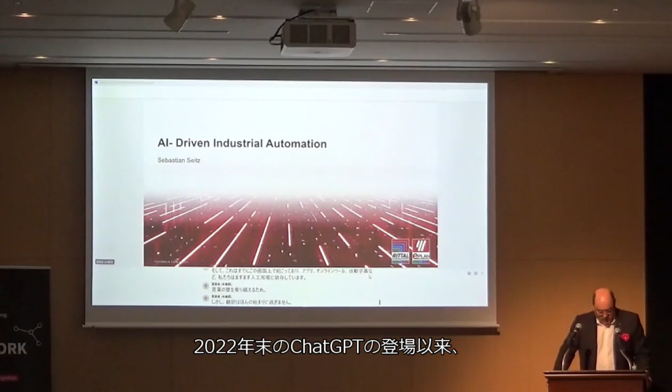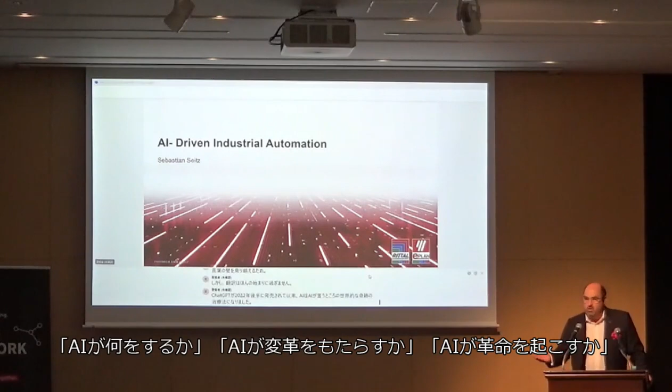But translation is just the beginning. Since the launch of ChatGPT in late 2022, AI has become something like a global miracle cure, a technology surrounded by both fascination and a lot of expectations. Hardly a day goes by today without bold predictions of what AI will do, what AI will disrupt, or what AI will revolutionize.

What I want to do today is bring this conversation a little bit more down to the ground, and especially how AI is finding its way into industry and especially into industrial automation, or even more specifically into electrical design. Before we take a closer look at what AI can mean for industrial automation, I would like to briefly introduce the Friedhelm Loh Group and the group of companies we are representing here.

Eplan, as you might know, provides software and services solutions in the fields of electrical and automation engineering. The company develops one of the world's leading design software solutions for machine and panel builders. Both standardized as well as individualized integrations to ERP and PLM/PDM systems ensure data consistency along the whole value chain. Working with Eplan means boundless communication across all engineering disciplines, no matter if it's small companies or big companies. Customers can apply their expertise more efficiently and work seamlessly in electrical engineering.

Worldwide, we are supporting a little bit more than 73,000 customers, and we were founded more or less 41 years ago, in 1984, and exactly 30 years later, EPLAN Japan was founded in 2014. Now we have a team of 20 dedicated employees operating from 3 locations in Japan: Tokyo, Osaka, and Nagoya.

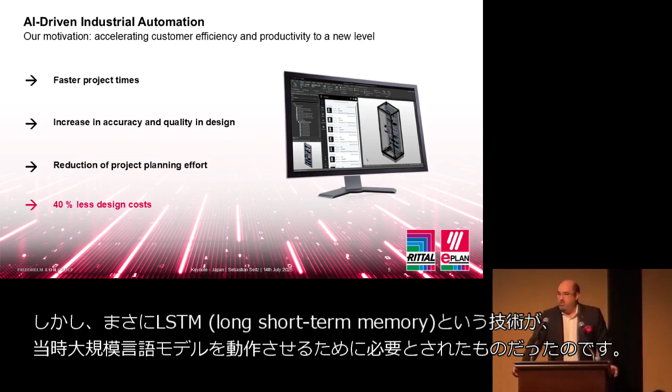In 1997, they introduced what is called the long short-term memory, which is an interesting phrase, right? A long short-term memory. But this is exactly what is needed to run large language models that were based on this invention at that time.

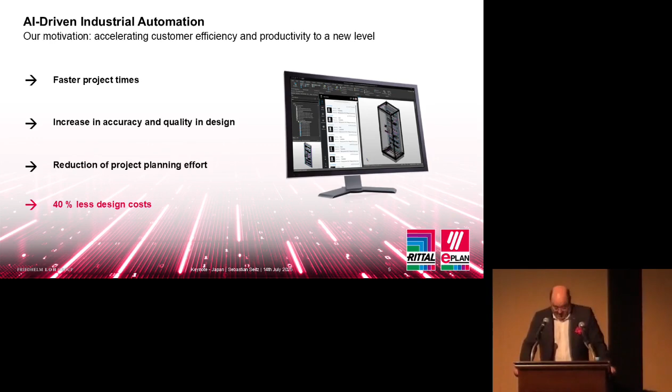These were not only milestones, but also - and this becomes then very American - billion-dollar investments by tech giants like Amazon, Google, IBM and Microsoft repeatedly led to spectacular demonstrations of what is possible. Think about chess computers beating human chess masters, AI systems winning board games like Go, or quiz shows like Jeopardy.

Yet none of these achievements truly brought AI into the mainstream. We all watched it, we were fascinated by it, but it never became applicable to what we are doing in our everyday life.

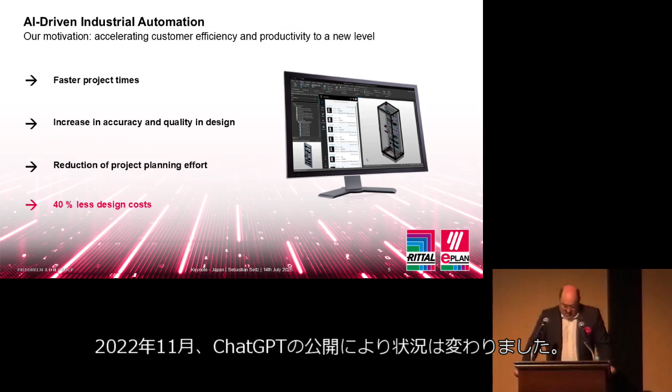But this changed dramatically in November 2022, when the ChatGPT service was officially published. Developed by OpenAI, it's based on a large language model which was trained on massive amounts of text.

For the first time, even complete novices could interact with AI in natural language. You can prompt in your own language with the model, and the model translates whatever it takes in each language and has in its backyard all the information it was trained with in the form of text.

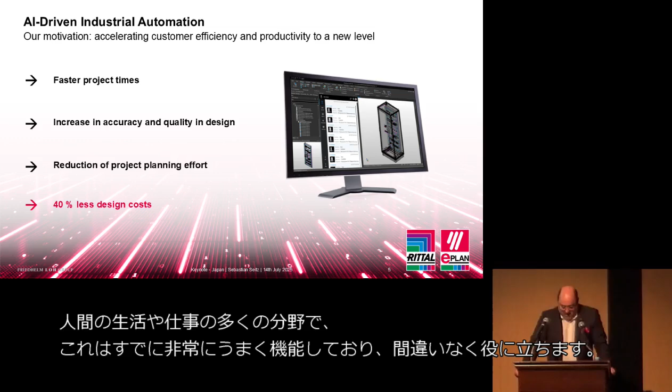From this time on, I think, is really a pivotal change - AI is on everyone's lips. Mainstream AI aims to extract the most meaningful response possible from its training data to answer a wide variety of questions. In many areas of human life and work, this already works remarkably well and is undoubtedly helpful.

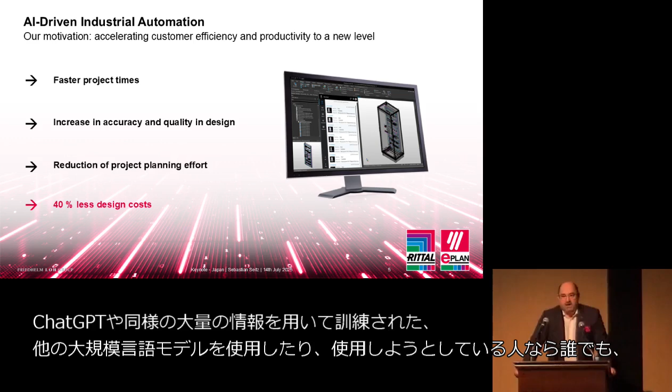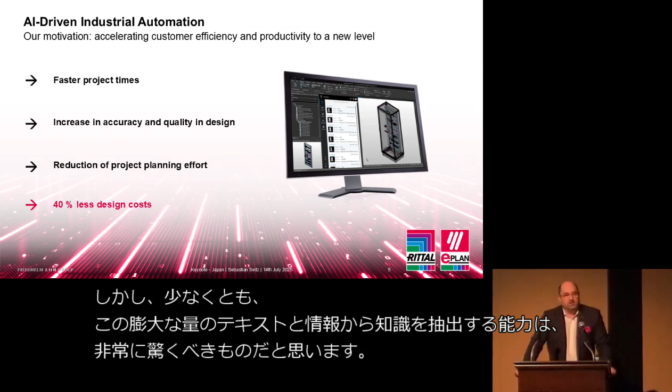I think everybody who's using or trying to use ChatGPT or any other large language model trained with a similar amount of information can see how meaningful this can be and how efficient you can get. That doesn't mean you always get the right answer, but the extraction of knowledge out of huge amounts of text and information is, I think, pretty remarkable.

Let me talk a bit about Eplan's approach on how to use AI. Our focus lies especially on the opportunities and potential in the industry. When it comes to supporting creativity, the key question is: how can AI relieve engineers or designers of tasks that can not only be automated but done even better and significantly faster?

I think we all know that in many processes there is still manual work needed, where we're repeatedly doing the same thing over and over again. This is something interesting where we need to think about how AI can help in replacing those tasks. I think we are far away from AI really designing products or being creative and shaping new ideas, but in helping us get rid of repetitive tasks and, let me say, bad work, this is something we really need to look at.

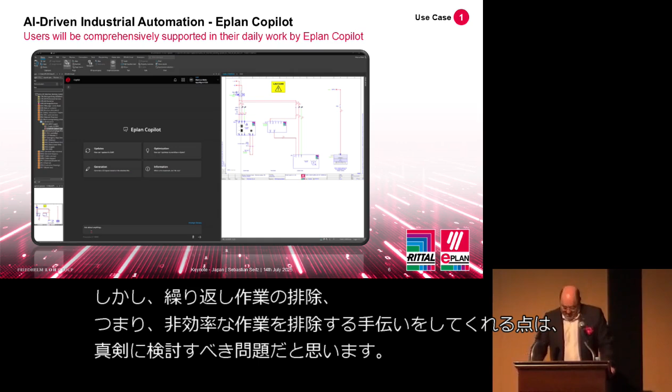And this is exactly where we as Eplan are looking into. Our mission is to empower electrical engineers with sustainable AI-based solutions that adapt to their specific needs while maintaining the creativity of a human being.

Developing these technologies is not a small feat, as you know. It requires deep domain knowledge and precise understanding of customers' environments. But this is where Eplan, I think, excels.

And we all know the inconsistency of AI as you have it available today. You really cannot trust the answers. Sometimes those systems are really hallucinating and creating funny answers. But think about it - you would ask an AI to do a security design for a machine. It would not be enough for this design to be right in 90% of all cases. It has to be 100% right.

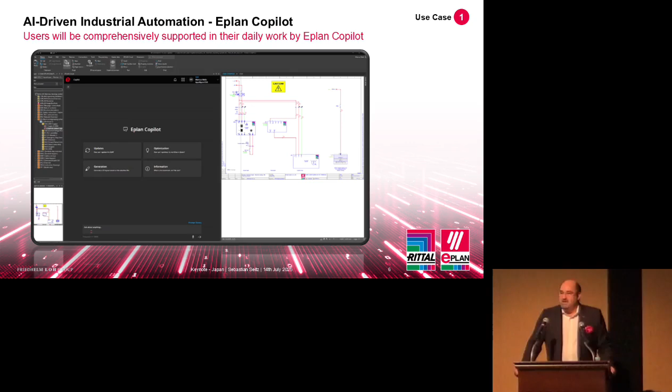So we all know that we need to train those models with very specific knowledge, a lot of domain knowledge, so that the answers a Copilot can create are not hallucinating, and you can rely on what the AI is bringing up as results.

For years we have focused on supporting engineers with innovative solutions, data, and methods to streamline and simplify their daily tasks. I think AI takes this even a step further, enabling us to develop tools that reduce manual work, automate repetitive tasks, and make the engineering workforce more efficient than ever before.

We rely on a strong team, so for Eplan this is not a new thing. We have experienced AI experts who develop data-driven and scalable solutions for automation and engineering. With deep expertise in software integrations and cloud technologies, we are creating intelligent applications that seamlessly integrate into existing systems. As pioneers in the automation of design and development processes, we actively shape the progress - practical, future-proof, and efficient.

We have been taking care of this since 2018. In 2018 we founded a team called AIDA, Artificial Intelligence and Data Analytics department, that has been working on the analysis and validation of engineering data, machine learning, and the use of AI models in the context of engineering solutions for automation technology.

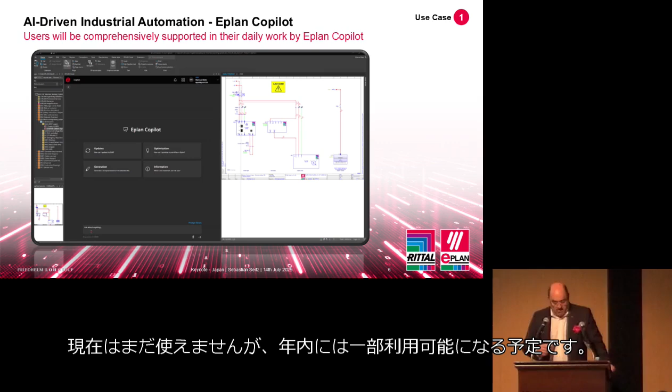So let me start with the Eplan Copilot. You can see it's already integrated in our surface. It's not available yet, but parts of it will become available by the end of the year.

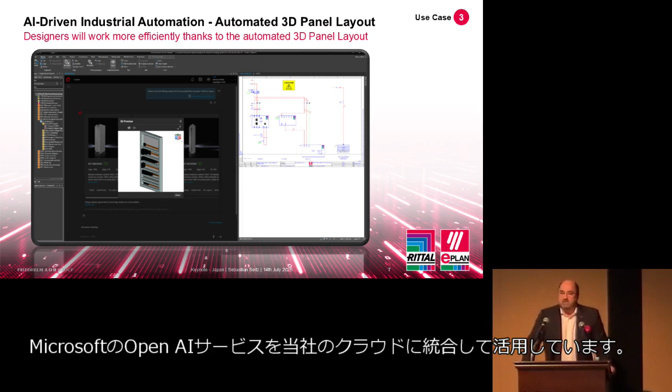This was a showcase that we have been presenting at Hannover Fair this year in April, in collaboration with Microsoft, using their OpenAI service integrated into our cloud. What we wanted to show here is a real practical example of what AI can do.

In this example, imagine you just take a bill of material from your customer, and you want to provide a first offer or a first 3D view of how a design or a cabinet can look like based on a certain bill of material. So what we did is we took a bill of material which was just a blank list of components, matched them against the data portal, got all the dimensions back from these parts, and built a 3D panel layout out of this information.

First we arranged them on a certain size of mounting plate, and then generated a 3D model out of this. You can see this in the middle of the picture, with all the DIN rails and everything. So it's a little bit of magic, but it's still just the beginning. We were using AI in that case, but the model generated is also based on rules, because AI can't do this magic at the moment. But we are pretty sure that in a short period of time this will be available, and we can work even more precisely.

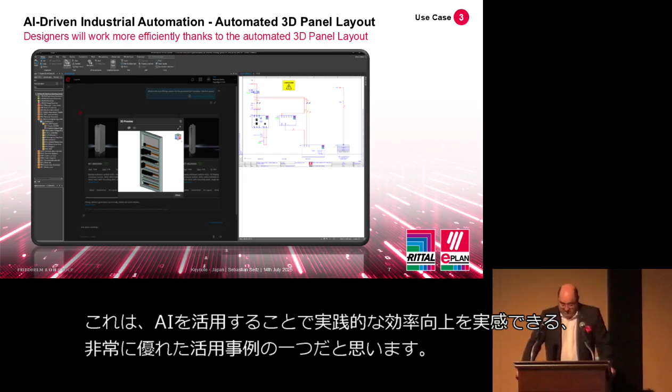Out of the same use case, this kind of pre-selection of a fitting enclosure, the right size of an enclosure, was derived out of this model. So this is one of, I think, the very nice use cases where you can see a practical efficiency gain when using AI.

The second one, I think, that was pretty interesting to see is the one that we did together with Siemens. This is a totally different thing. It's not within the EPLAN platform doing some nice stuff within the engineering process. This has been done to close the gap across processes and perhaps even across companies, but at least here across different system environments. For those of you working with Siemens PLCs and Siemens controllers, you know there is a huge software world connected with it. It's true for every PLC and controller manufacturer.

What we have been showing here is that if you're changing your hardware design on the Siemens side—in this example, the PLC was exchanged for a newer one—this should be done subsequently also in the circuit diagram, within EPLAN. So today, those two people working in these environments have to talk to each other, and there needs to be a change process in place. If somebody changes something on one side, you have to change it on the other side as well.

By using this agentic AI approach, we connected those systems to do this automatically. First, the agent did the change on the Siemens side, and then, through the orchestrator agent talking to the EPLAN agent, said 'can you do this for me also on the EPLAN side,' fully automatically and fully autonomously. I think this is where we should be looking when we think about where we want to really achieve high efficiency gains by using AI. I think these two cases show you pretty clearly where it can help.

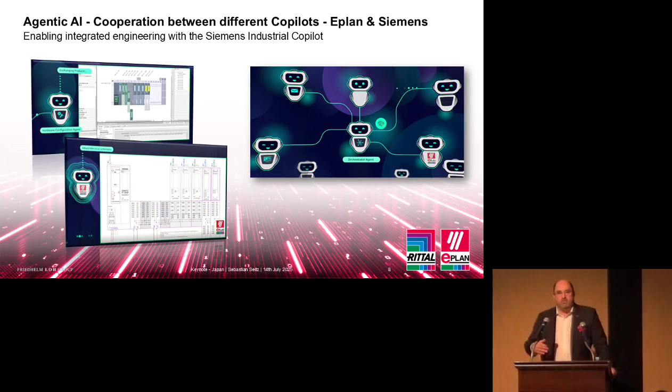But as most of you know, good software does not come from good coding. It comes from good requirements. And this is exactly where AI is not helping today, in defining the right requirements. This is where you have to listen to customers and describe problems that need to be solved. It's not about coding. In coding we get a lot of efficiency gains, and this is nice, but the software doesn't get better by this. It only gets better by humans listening to humans, finding the problems that need to be solved, and describing those problems properly. I can see AI helping in this process, but we're not there yet.

This would be the final step, the real step, where intelligence would also deliver intelligent solutions. Intelligence is defined by the ability to solve problems autonomously, and this is what it's all about. But then you have to define the problem. In the end, a machine never in itself has a problem—it solves our problems. So we have to describe the problem in the right way, and then the solution might be there much more efficiently than we used to have it.

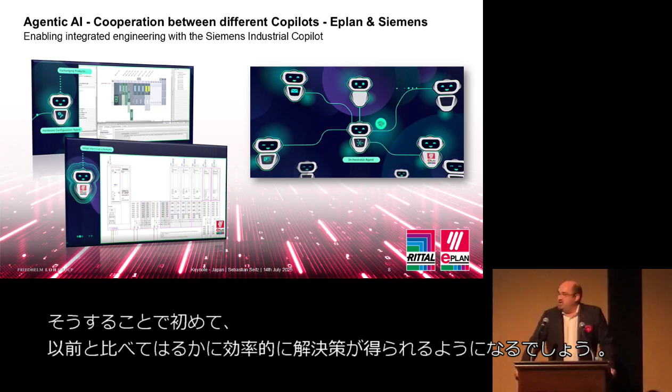So this is where we are heading to. This is what we are doing at the moment. Let me close my talk a little bit on why this combination of hardware and software is so interesting, and why we are taking care so much of it in our group of companies.

Even though it's not directly connected, you can see it. We are taking care a lot about how to implement those technologies into software, because at the end it's a software game. But the software is nothing without the computational power and the hardware behind it to let it run.

And this is where Rittal comes into play. You might know or might not know that Rittal is one of the key suppliers to these big tech companies running those big data centers, making AI available to every one of us—like Microsoft, Google, Amazon, and so on. And this is where we're looking into. There's a lot of technology being provided also by Rittal.

Think about direct liquid chip cooling—your kids might have it at home in their computers. There's also liquid cooling already available to high-performance gaming PCs. You can imagine the same thing but on a pretty large scale. Think about one rack—and this is really one rack, a bit bigger than this steel here—producing 1 megawatt in cooling power. So this is pretty amazing. It looks more like a brewery than a cooler.